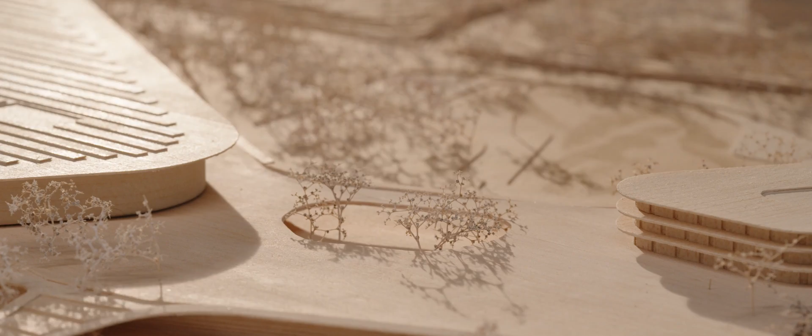Today we are going to talk about our future campus, a huge project that we have been working on for several years already and will be working on in the next couple of years. Welcome to the second season of Mondays with Mate.

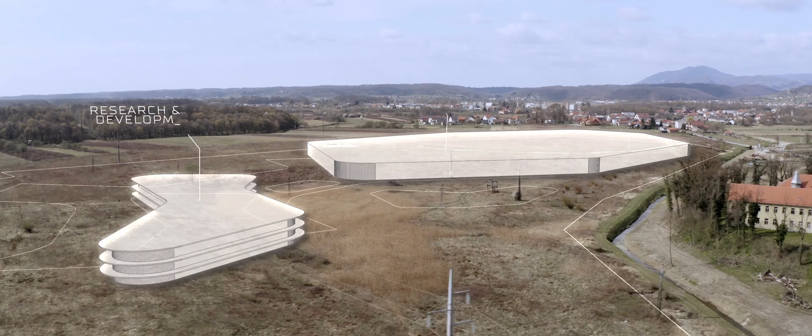Within those 8 years, we didn't stand still. We are working on the plans of the campus, and as the company evolved, the campus plan has also evolved and grew. Now we plan to build an R&D, production and testing facility for 2,500 employees, where we will develop, design, produce and test all our products, battery systems, powertrain systems, our hypercars, and many other things that we are going to do for the future.

And it's more than just the functionalities of the building. As with everything we do, we strive to do the best. Lots of governments have lured us to build up future capacities in their countries, but we always wanted to prove that it's possible to do it in Croatia.

This was the perfect location to do it because it combines a lot of things that work for us. It's nearby our current location. It's just outside of the capital of Zagreb, that's right here. And on the other side of it, we have a forest. So it's in front of the capital city of Croatia, but in the middle of nature.

So it shows our brand values where we want for the people to have a high quality of life that's working in Rimac, to be able to live in a big city, but also while working to be exposed to nature right next to the campus.

The land plot we are on currently is 200,000 square meters, which is enough for the next few years of our growth. And we have already a very detailed plan of what we want to do here, so we know that we are currently standing in our future vehicle assembly, where we will assemble future Rimac Automobili hypercars.

For a project like this, we wanted to have the best possible partners, people that share our values and that will go this journey with us over several years. We made an international competition with architects from around Europe to submit their proposal, and we saw some amazing proposals coming from them.

Surprisingly, the Croatian architects were by far, in our opinion, the best. And we chose to work with the Croatian architects 3LHD studio, which will be our partners in developing this from start to finish. So let's go to 3LHD and see what they came up with.

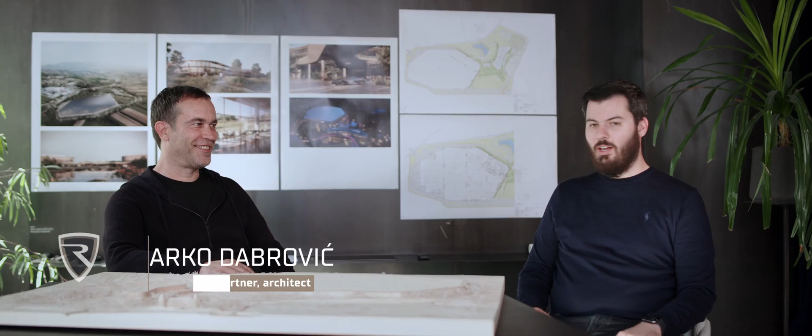So here we are in the 3LHD studio in Zagreb. I'm joined with Marko, one of the founding partners of the architect studio 3LHD, who is with us in this amazing journey. Thank you, Mate.

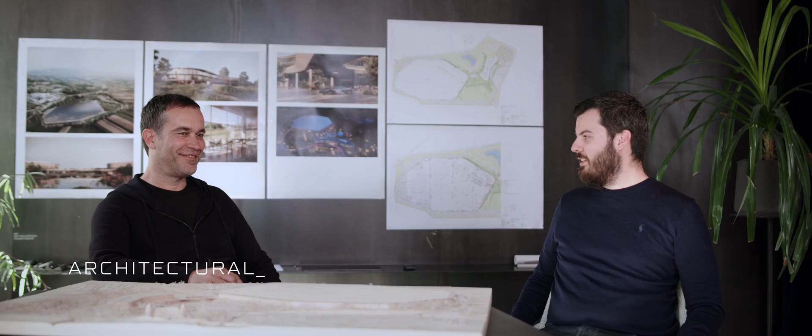I heard good things about you guys. I spent some time in the hotel that you guys designed, and it was one of the most amazing hotel experiences that I had. So I was like, these guys know what they are doing. So let's see how they can build a factory. Yes, very simple, from hotel to factory.

And maybe that's a little bit the challenge of being in Croatia. There's no industry. So you had to... It's always a question when they ask you how many hotels you built before. None. How many factories? None. So it's challenging to be an architect in Croatia. You have to, everything, it's like a prototype. So we are accustomed to this, but same as you, how many cars did you do before? Yeah, exactly. With my amazing previous experience of high school. That's why we maybe dare to do more, or where others would say, oh, this is not a good idea.

We are maybe daring to take a bigger risk. Rimac is now far from the beginnings with the garage of 10, 20 people. Now we are 1,000 people. But it still feels like family. And the question is, how do you scale it up? Here in this facility, there will be 2,500 people one day, maybe even more pretty soon. And how do you keep that? I think space and surroundings are really important for that.

It's not just like the walls around you, it defines in a way, or actually the building should reflect our values and our company and our whole ethos. Yeah, we took your brief. Which was not so brief. Yeah, but you know, different project, different owners, different briefs.

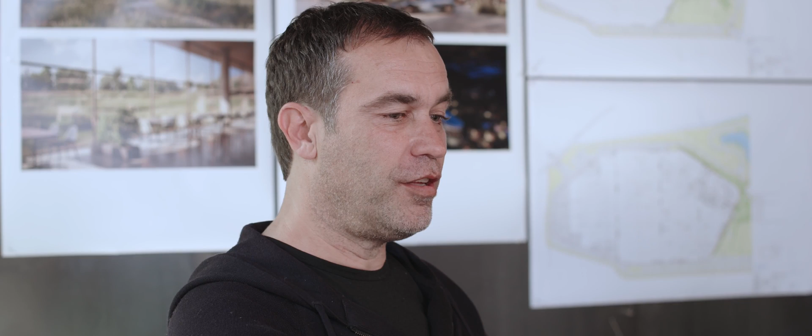But this was an interesting brief because you had a vision which is not only the buildings itself, but creating a family out of the whole business and scaling up. From the beginning, it was obvious that we have to satisfy some things - it's a big R&D facility, big factory, testing.

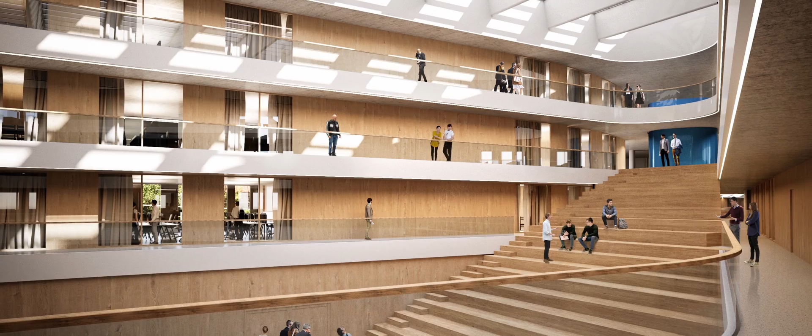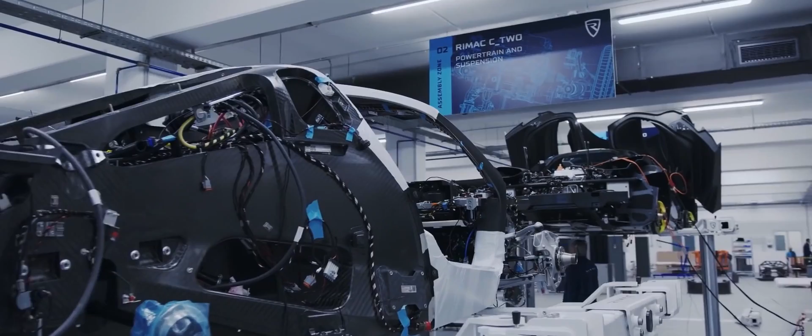So we had some musts and some wants. The musts were like how many square meters we have to have for the production, that we want to have everything together - all the production. So the hypercar production and all the parts of the hypercar, plus the high volume production of the batteries and powertrains for other bigger car companies, and so on. The research and development next to it, restaurant and so on.

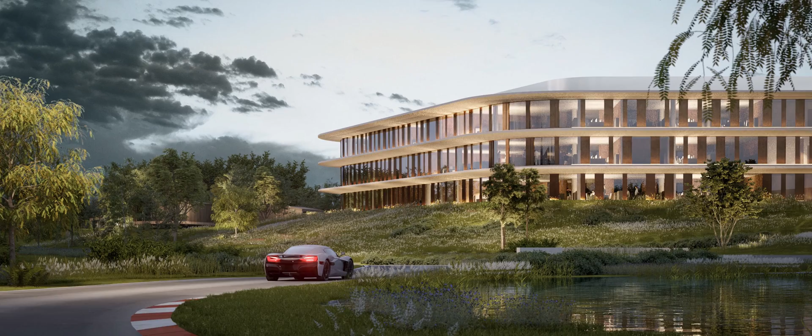But the softer things were a big focus, because I think just making a functional building is relatively easy, but to incorporate it to make something very special is maybe more demanding. So we wanted to have a place where people will enjoy spending their time. That was the guiding principle around it - it's designed around the employee. The employee should feel great and can't wait to go to work.

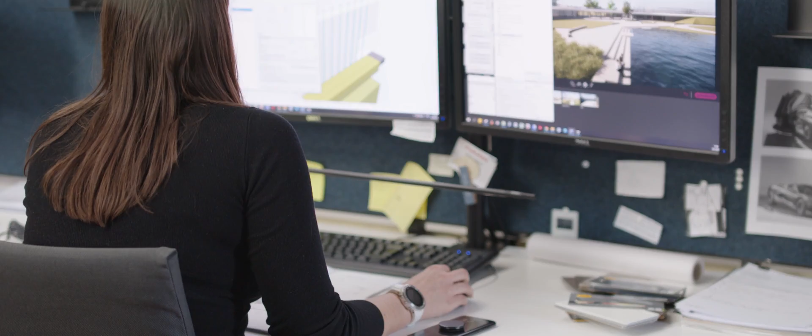I was doing a tender for a campus for the first time in my life, and I think we did it quite in an organized way. The period to design was very short - it was one month. So somehow we made a parachute team in the office. It's always the best way how to do it - you isolate some team, and they were only working on this campus.

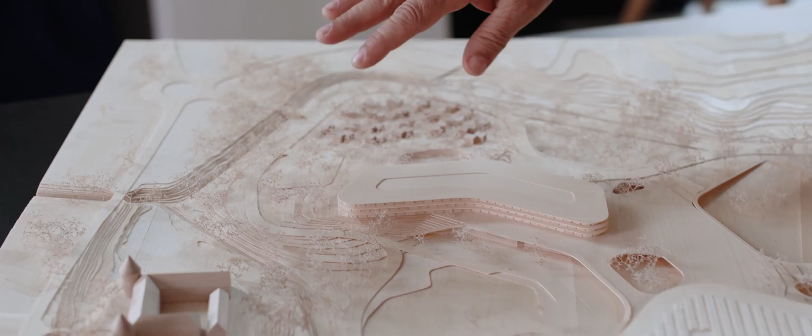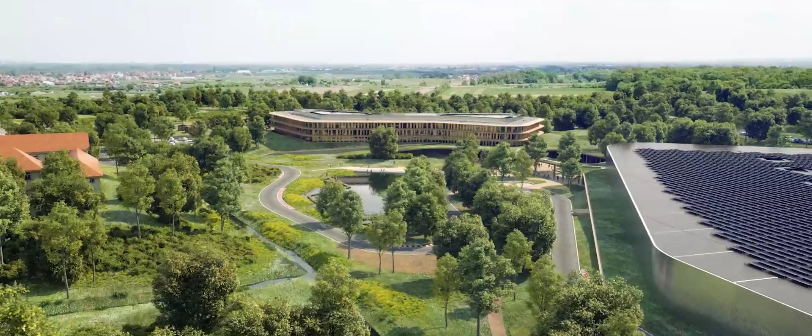First, we start always from the landscape. So we had this beautiful castle over here, and then a valley over here, and two higher levels. Using these levels, we found out that we can build on a flatland factory. On this, we can build an R&D building, and in the center we can create integrated space for all of them.

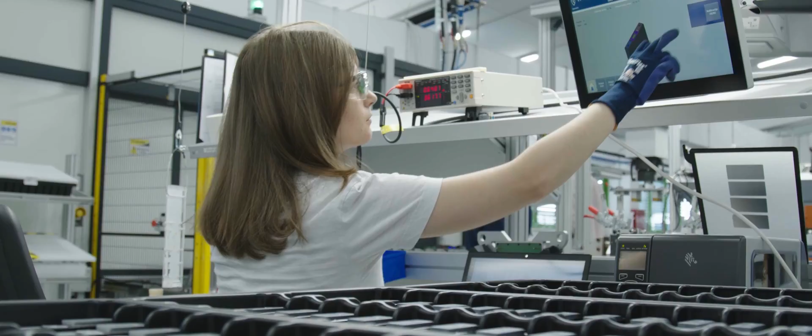This needs to be a very functional building, not just a beautiful one. It needs to ship very complex products in large volumes. So it's designed to produce hundreds of thousands of battery packs per year, very few cars per year, but a very high vertical integration. So what we have here approximately is the logistics area where we have the trucks coming in and the warehouse, which will be a high throughput warehouse for the high volume production projects.

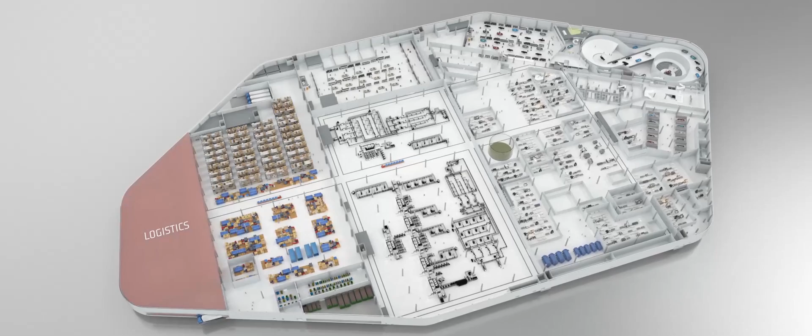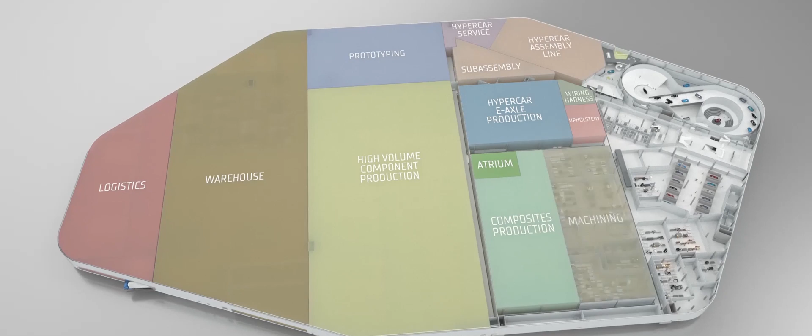Here we have the high volume production, meaning battery packs and powertrain systems and so on. This will be a very automated area, very classical factory, let's say industry 4.0, very robotized part of the facility. We'll have here a prototyping area to prototype cars and other components, which will be quite big because we have several projects ongoing at the same time.

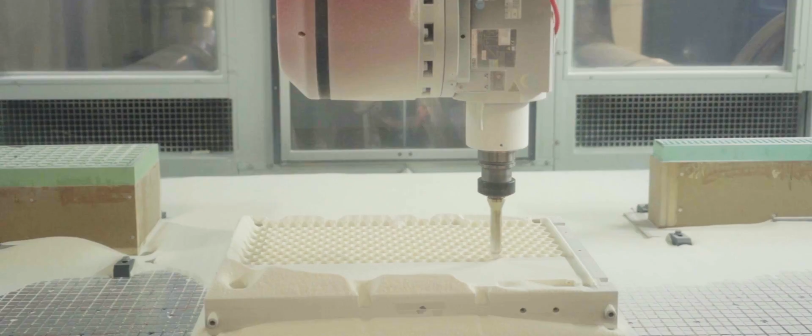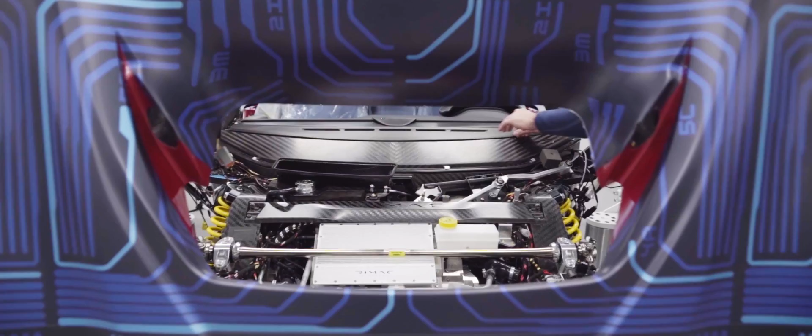So let's say this half of the building is the high volume industrial area. We have a big area for manufacturing of the metal parts, so machining, CNC, and producing of the tools. Then we have assembly of subcomponents like the axle or the suspension system or the infotainment, assembly of those kind of components, and then the beautiful production line here.

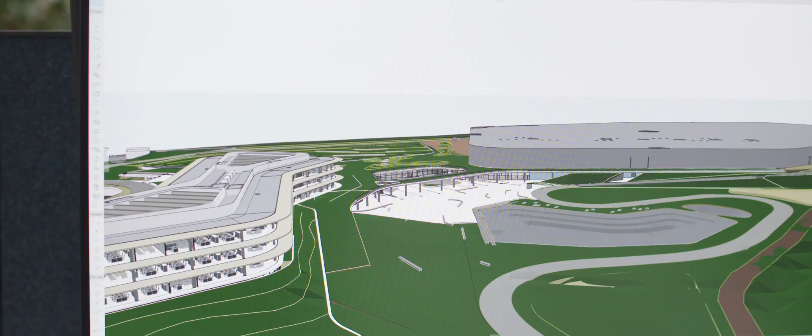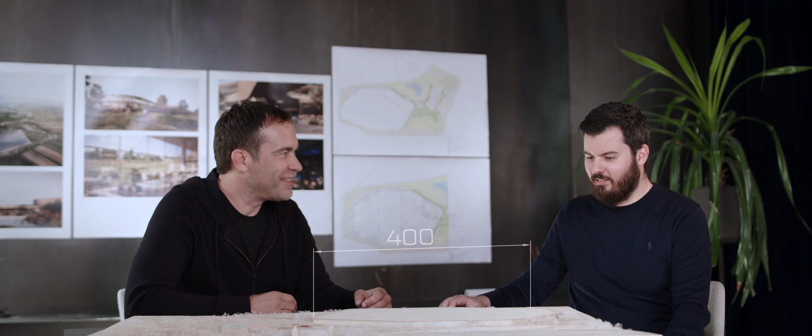If you look at this, it looks like an actual normal building, but during design we always forget what is the scale of the building. Somehow everything seems quite usual when you look at your desktop screen, but then when you zoom in, you endlessly have to zoom in to get to the size of some room, or say, a toilet, which is always recognizable in any floor plan. But this is 400 meters, so it's like four football pitches, one next to the other.

It's just 9 seconds with the C2 from 0 to the quarter mile. Yes, this is the scale of the motion of the fast cars.

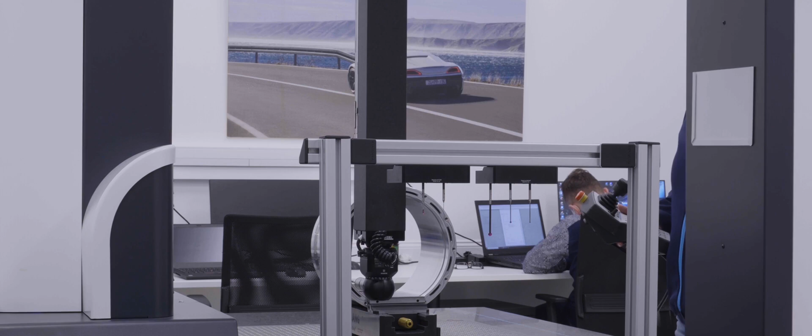The core of our company is the R&D - the hundreds of engineers that are imagining and developing and designing and testing our products, batteries, cars, whatever. So the R&D part of the facility is really the heart of the whole campus. And making the engineers happy is one of the top priorities, and having them in an environment where they can work extremely efficiently, focus on their work, and enjoy being there.

So how did you translate that into the building? The R&D is a very interesting building. It's located over here, which is a little bit changed from the competition. We have two atriums, each of them unique.

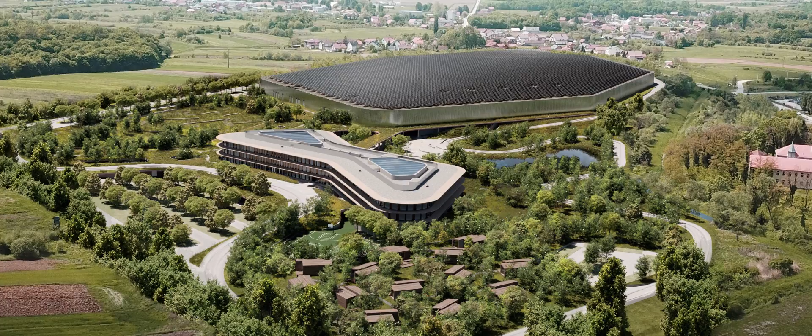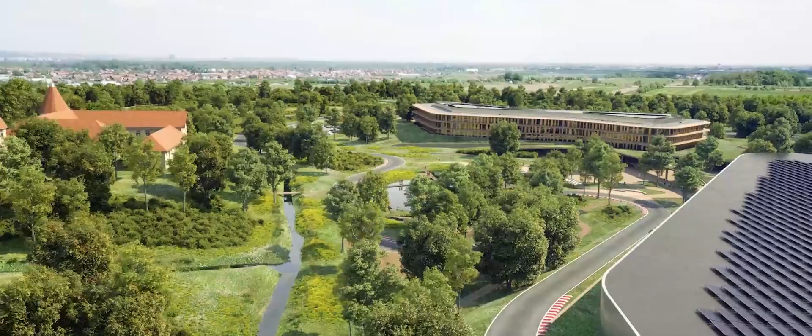One is planted with inside trees and forest, and the other one is like a big assembly hall for all your engineers, so they can all meet in all hands meetings, but they are directly linked to the restaurant. So somehow this building is really open with beautiful views to the forest, to the lake, to the castle, and to the south.

But also having in mind that people have to have bilateral light, we made these atriums so they can have light in the offices from two sides.

In our office, we are much smaller than Rimac. We are 60 people in the office, but we all lunch together, and we think the lunch is something that relates to family. And this is the reason why the centerpiece in the Rimac campus will be a restaurant, not an R&D building, not a factory, not a car, but lunch.

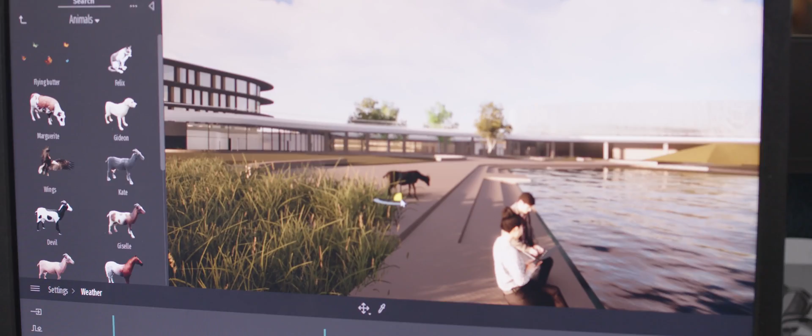Maybe an interesting part there is, some of you might know that I don't eat meat. And of course, I don't want to force anybody in the company to stop eating meat, but an interesting little thing is that I wanted to have sheep and cows running around, so that people see through the glass these nice cows, pet them, and think about what happens based on their choices when that poor animal ends up on their plate. They still have the choice to do it, but have a more direct connection with it.

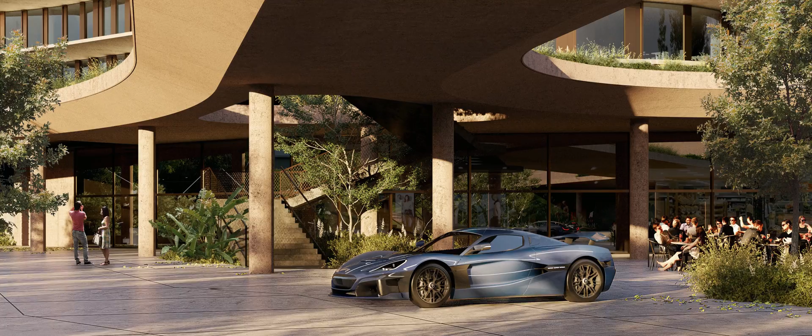I think one huge advantage of our company is that the people can see the products that they're making. So I want them coming to work and mingling around to see cars, batteries, motors, and so on. So this square area, lake, and restaurant area is really a meeting point where everything comes together. We can put cars there, customers can come there, right?

How did you imagine that part? So we imagined this as some very open and public space where people from the factory, people from the R&D building are meeting with people who are just getting to the campus as average visitors.

So from there they could enter directly into the museum. They could also go and mix with you at lunch, which I think is also something cool, that you never have a restaurant closed after working hours, but people who are in the museum can go to the restaurant and see what Rimac people are eating. So I think it's a great exchange of ideas.

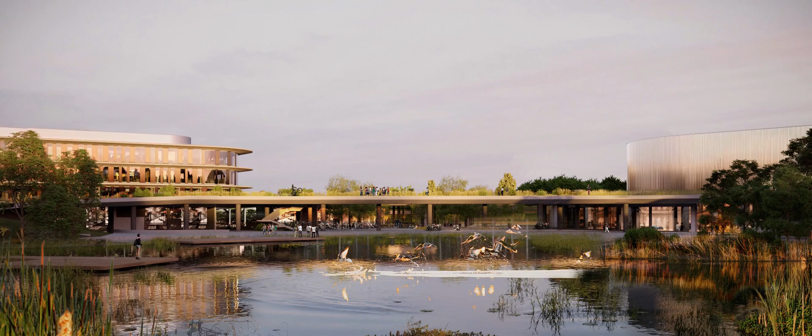Actually, this will probably be the only automotive research facility which will not have a fence. So from the west to the east, we have different amenities. First is the museum, next to the museum we have a cafe bar, then a large restaurant. From the restaurant, we have a barber shop, veterinarian, small kiosk, and small shop for different amenities. So I think the openness of the campus is very important for the culture of the company, and also for the influence from Rimac to society.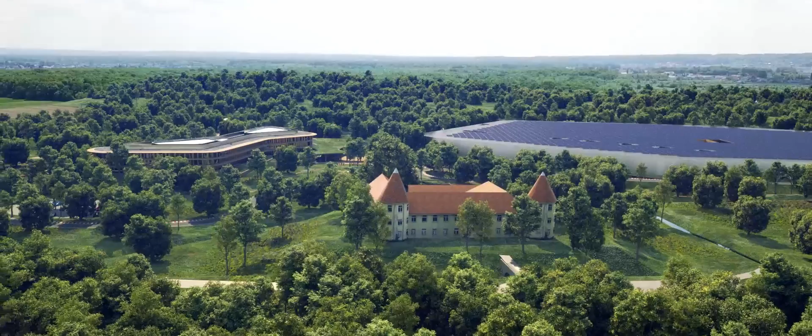And also from here you have this open view towards the castle. I hope it will not be the ruin it currently is, but that we or the city will improve it, so there is a beautiful view from the campus to the castle and from the castle to the campus. Because we also paid a lot of attention and worked with the conservators to not impact negatively the cultural heritage of the castle.

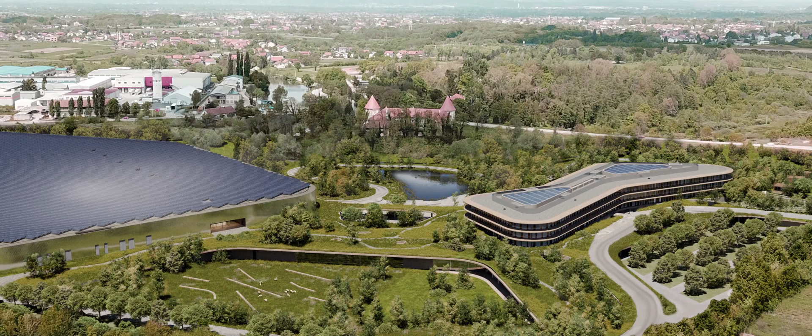We were limited by the height of the castle roofs, and also by spreading this into two buildings, we somehow made this central axis. So from the castle, you're not blocking the horizon, it still breathes. So the base of the castle's roof was the maximum height for our facilities.

I didn't mention the racetrack. It goes all around the property. We didn't mention the most important part.

We found in your brief that company Rimac is serious and crazy, that is this balance. And from this balance, we thought, okay, these guys like to drift, so there was actually a requirement that there has to be a drift corner, a mandatory drift corner. If you go there, you have to drift.

My favorite spot of the campus. Yeah, the drift corner could be one. Let's see, definitely not the gym, that's not going to be my favorite part. Probably, I think the production area.

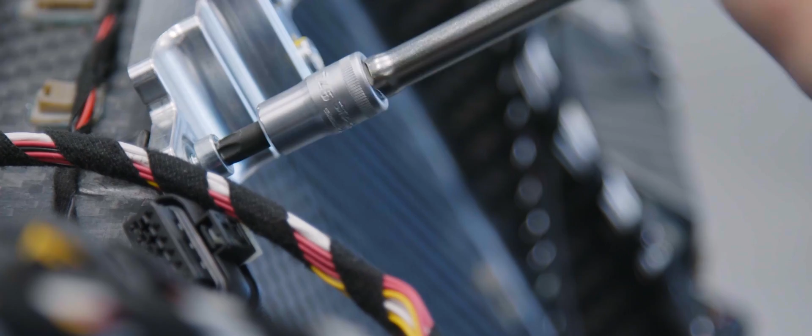Currently, with the separate locations that we have, I really have to plan to go to the production facility because it's half an hour drive there, half an hour drive back. I need to plan which meetings can I have in the car while driving there to lose minimum amount of time. Here it's great when everything is together. If you have a light meeting, just put your AirPods in your ears, have a 15-minute walk around the facility and see what's going on. And I think that's amazing, that's what we really want to encourage, that engineers, office staff, and support functions all just take a walk through the facility, ask the guys on the shop floor how it's going, what's going wrong, where they need help.

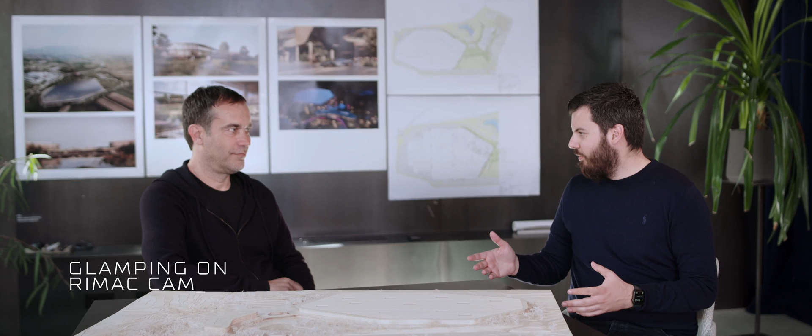That's where you see all the problems, and having that close and together is key. We wanted to provide a great experience to our visitors and foreign employees who join us, not just in the company, but also to help them with accommodation. So we wanted a great place for them to stay overnight when they come for a meeting, whether customers from another car company, or an employee coming from across the world before finding accommodation with the company.

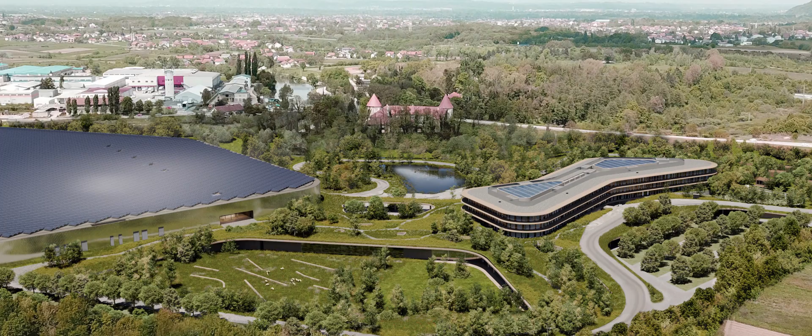So, Marko, how did you solve that? I think in brief, it was more like designing a hotel somewhere on the site, because we had this perfect balance between these three buildings. We hid the restaurant and all the amenities that shouldn't be striking out, so where do we go with the hotel?

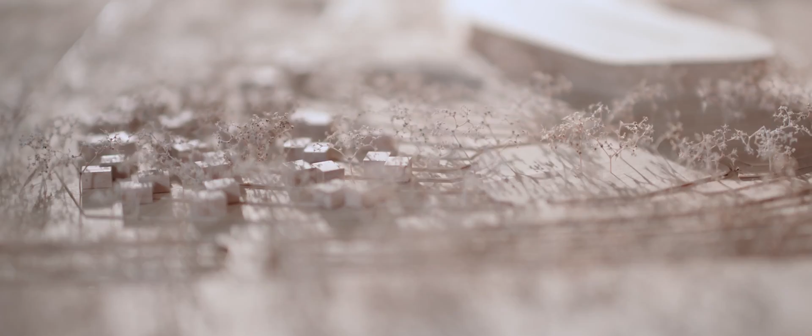Instead of making a hotel, we proposed a small village, like structures, wooden buildings, where people could live like glamping. You come to the glamping site and can find some friends, get to know the whole place during the first one or two months staying. We also made a small community house with a fireplace, where they can meet each other at night when the factory isn't fully working or the R&D building is empty, so these people can form a little community.

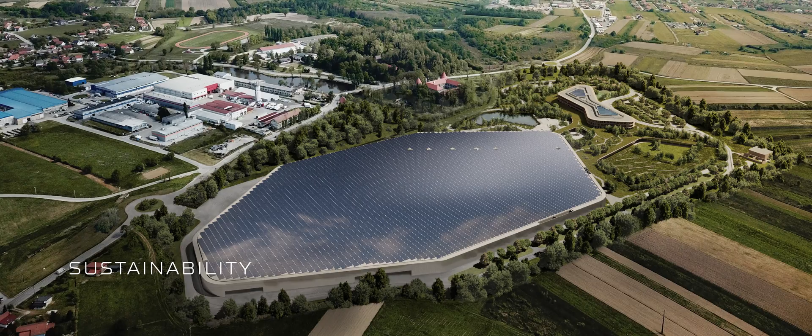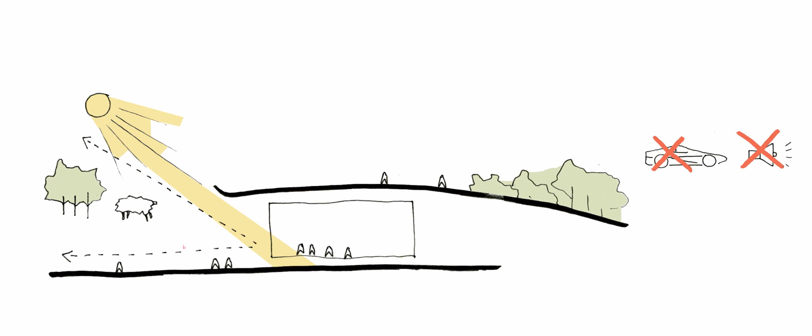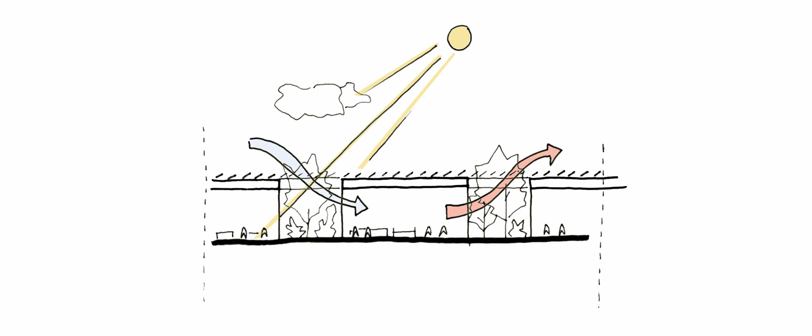Thinking about sustainability, it's important to make compact buildings to reduce the amount of sunlight heating up the building. We try to bring in a lot of natural daylight to reduce electrical light use, and also use as much natural ventilation as possible to reduce drafts in the offices. We also had consultancies from Germany, a top tech company, advise us how to do this with less technology to build a better environment.

Then use a lot of energy sources like groundwater as much as possible, and reduce the use of fossil fuels and materials which are not recyclable.

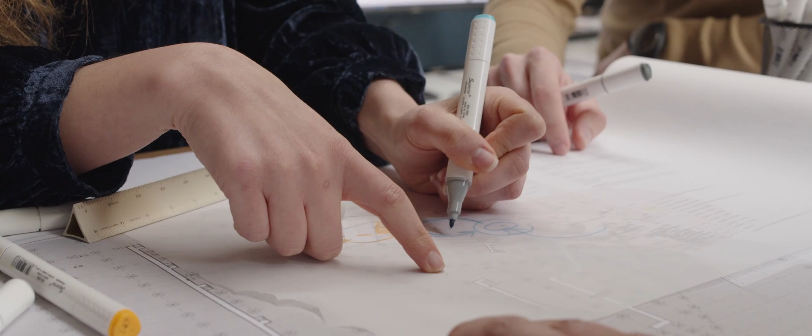Such a huge project is so complex to do, in design, realization, and paperwork, especially in Croatia, paperwork sometimes takes much longer than expected. It took much longer than expected here from when we first started working on it, so it's a little difficult to talk about timing.

We want to be able to move the first parts of production into the production building end of 2022, beginning of 2023. I hope the whole thing will be finished until end of 2023, but let's see. I say that with a big caveat, subject to many things going in the right direction, plus securing the capital we need to do this.

This is a huge chunk of money just for the building. Without any production equipment or infrastructure, it's about 110-120 million euros, just for the first phase of the buildings, without some extension we might plan. Plus more than 100 million euros in additional equipment like testing equipment, production facilities, production lines, machining, IT equipment, furniture and so on. So it's a sizable investment of hundreds of millions.

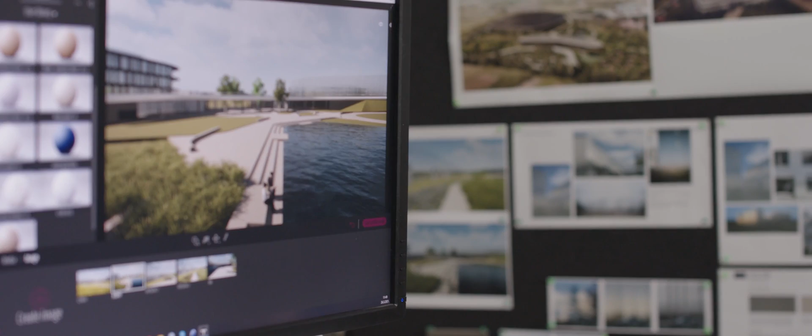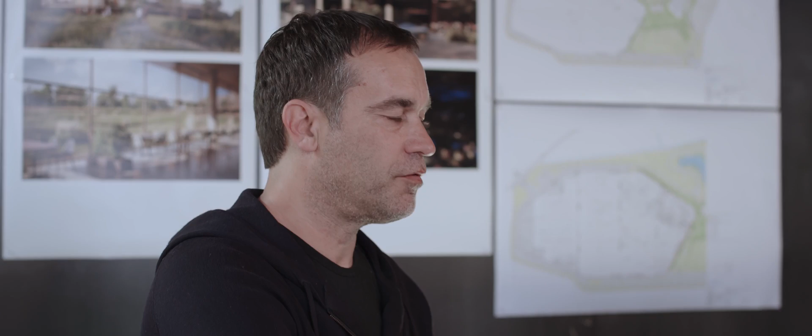Things can always go wrong, but let's hope for the best. It's very exciting to work on such a big scale campus. There are so many new things we learned with Rimac and the consultancies, and I hope the basic sketch will be translated into reality as much as we do in other projects. We're well known for renderings that look like the final building, so I hope at this scale too we're going to repeat that.

Just push print on the screen and there it is. But Marko, thank you so much for joining this episode with us, and especially for doing this journey with us. It's an amazing journey. When we are done with it, I think we can be very proud of it, and I hope a lot of other people will be proud of it and enjoy it.

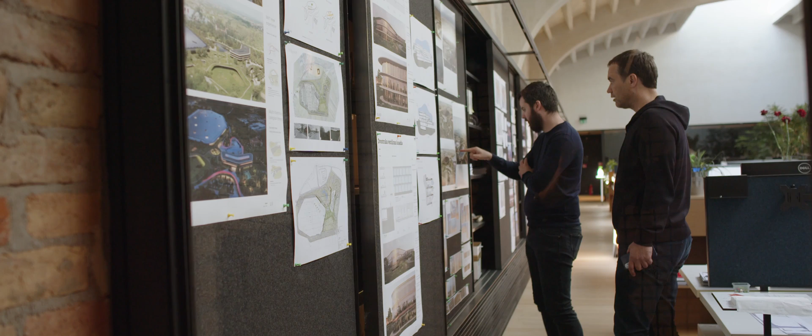It will give lots of excitement and pleasure to many people who work here and come here to see their products being made or to pick them up and bring them all around the world. I think it's something really special, and despite all the challenges, in the end I hope we'll have a beer together and finally it's done.